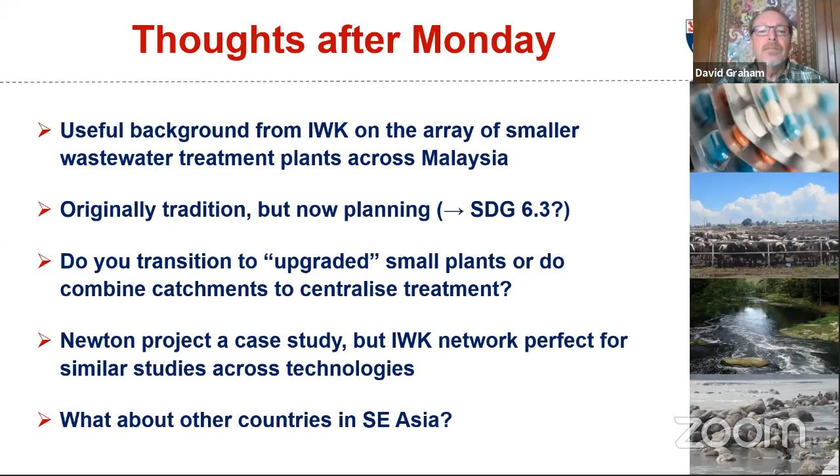The other question is more a question to other people in the group. We've now seen a nice picture of what's in Malaysia. I'd be curious about how this compares to what you find in other countries in Southeast Asia. We work in a number of other countries, but I was very impressed by the breadth of the treatment that existed in the country.

The question is whether you decentralize and improve, or you decentralize with new technologies. But the bottom line is that we still have the problem where some of these small technologies don't work very well. Sometimes they don't work very well because they're not managed extensively, but also because they're small. And small actually matters when it comes to biological treatment if secondary treatment is what you're really aspiring for.

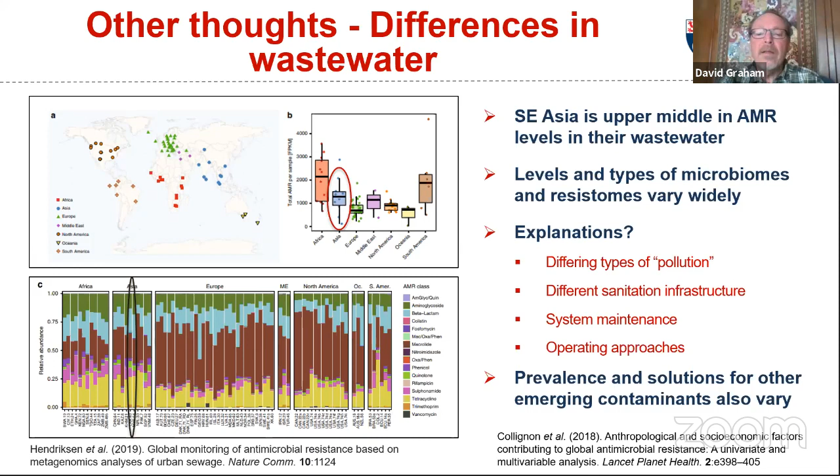So also when we're thinking about these decisions, this is another argument in favor of regionalization relative to decision making. Malaysia will be the best place to make these decisions, but in Malaysia, people have to consider some of the things they don't expect. And that's among the things we have to think about relative to health.

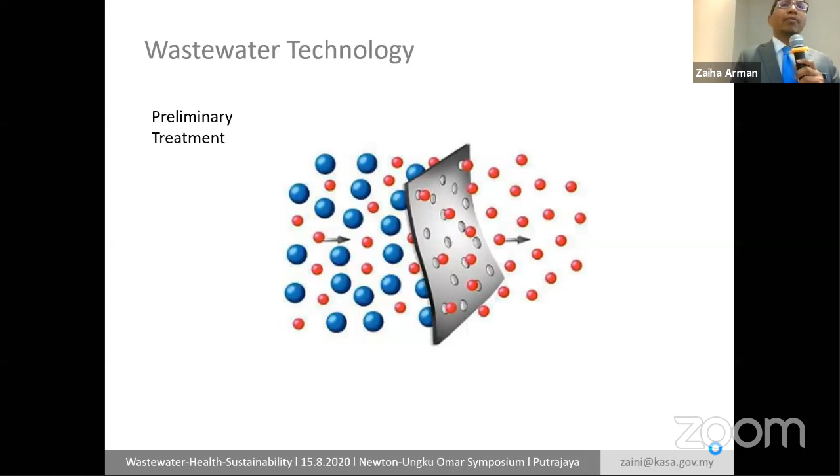But in short, for the past many years, the purpose of wastewater engineering, if you learned from the very basic, it started, according to the books, with preliminary treatment, primary, secondary, nutrient removal, disinfection, and we have all this. But I think it's very important for us. If I were to write a book on wastewater in the future, I would go by objectives.

It's by set of systems, units, and bioprocesses that we have. So, for example, number one is waste collection. We have to remove waste. Otherwise, you will be in danger of solid waste management, where you don't know the most efficient way to collect. And the second is public health.

The third one is resource enrichment, means that you have additional water. In the Malaysian plan that we are drafting at the moment, by 2030, we are aiming to have 1,500 MLD of reclaimed water. We will make it known in the next few days. Make sure that whatever resources we have, you don't want to let it go. It can be used for many purposes, especially industrial.

Then nutrient recovery and water recycling. So these are the outcomes. I think it is more appropriate now to talk about the outcomes rather than what is the size of the wastewater treatment plant we are talking about. What are the most efficient technology? If it is cheap and it can meet all the requirements, we go for it.

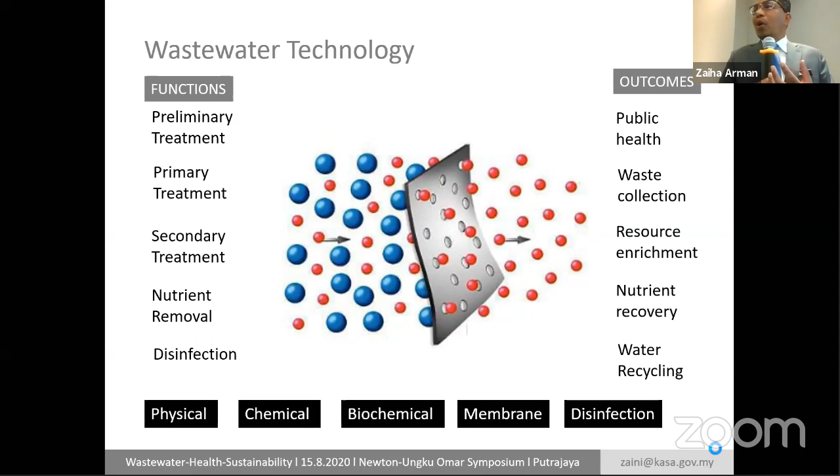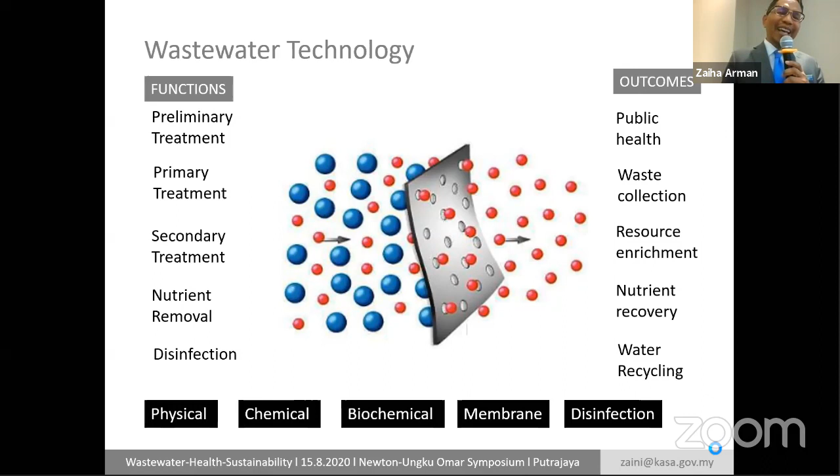Instead of obliging, because my PhD is on activated carbon, I want to use activated carbon everywhere. So this is the perception of many of us now, being in academics for so long. I found that is the sickness within the academic community. They want to sell whatever they know without being able to learn something new. I'm so sorry, David, for saying that. You can disagree with me, but I think this is important.

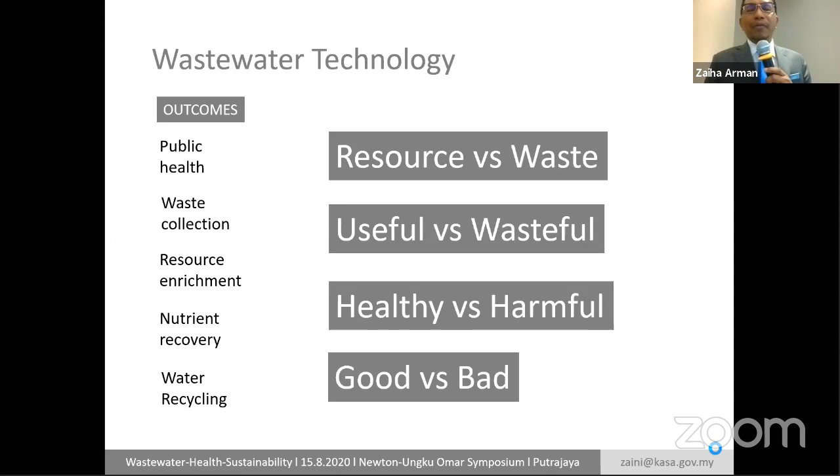Resource versus waste is something that we have to identify. What is useful, what is wasteful, what is healthy and what is harmful, and also important, what is good, what is bad. By having that, we will be able to use various kinds of technology, and by matching them with the outcomes, we'll get what I call matching CBA, cost-benefit analysis. I'll give you an example.

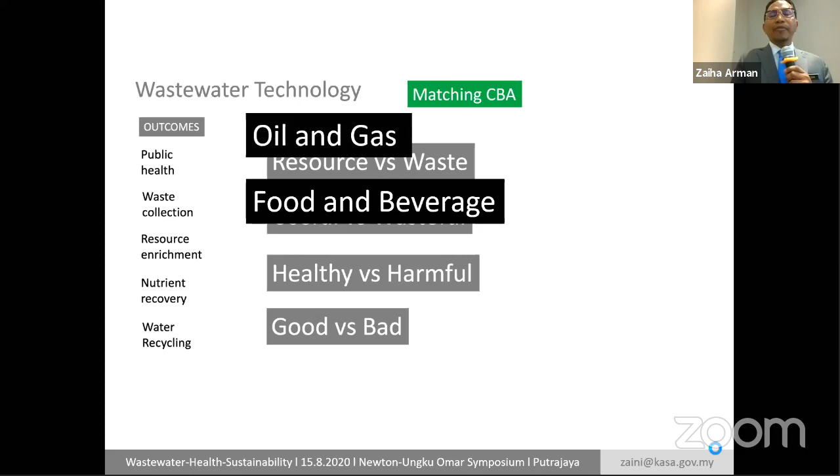For the past many years, advanced wastewater treatment plants are being funded by oil and gas companies, especially if you're thinking of advanced solid liquid separation, advanced liquid separation, membrane treatment. It's all funded in the first place, in the earlier stage, by military and oil and gas. Then food and beverage, manufacturing, agriculture, and environment. And this is the opportunity for us to look back into this.

I think now we are moving from linear economy into circular economy. In the past, we extract as much water as possible, we supply, we use it, and then we treat it and we dispose it. That's the linear economy. But in the future, we are not going to do that. We think that whatever we extracted from the natural environment can be used up to a certain level.

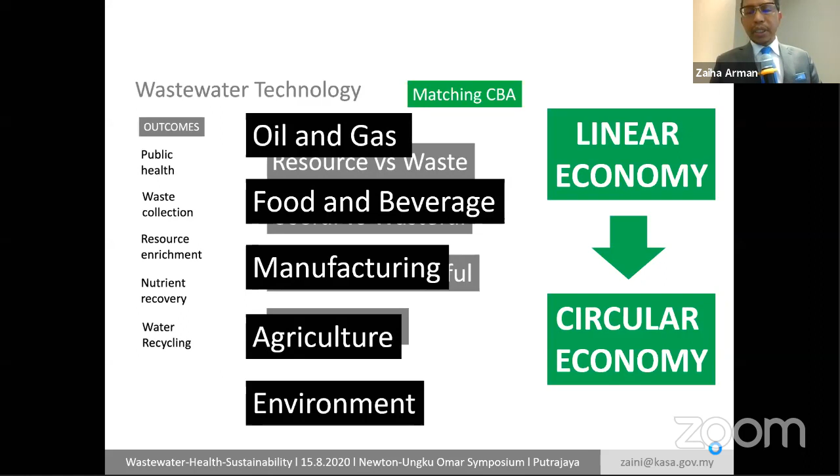I think today we are here to discuss clean water and sanitation from the perspective of SDG. So this is what we discuss in the World Health Organization. For example, we have been discussing this for many years, and then recently we came back with a nice sanitation safety planning. Started with safe use and disposal of wastewater, grey water, and excreta in particular. So we have to prepare the SSP,

So identify hazardous events, assess existing control measures and exposure risk, and then develop and implement an incremental improvement plan. This is very important, and it's very expensive. In Malaysia, we have 3 ways to fund our sewerage programs. First, by housing developers. So if you are staying in Johor, for example, almost all residentials in Johor Bahru at the moment are, I think, funded through the mechanism initiated by project proponents, the developers.

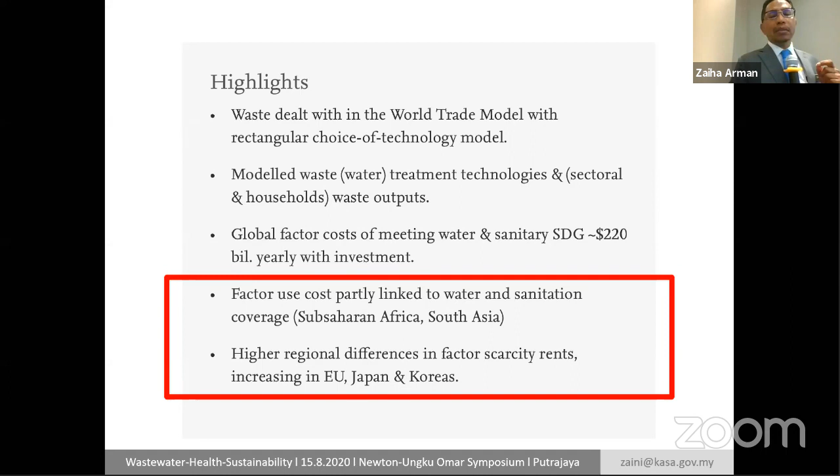When we talk about the whole water ecosystem, factor use cost is very prominent in Africa and South Asia. But in other regions, factor scarcity rents means that because of the scarcity of water, they are willing to pay more, willing to invest more in better technology, better facilities, to make sure that they get better water supply in particular.

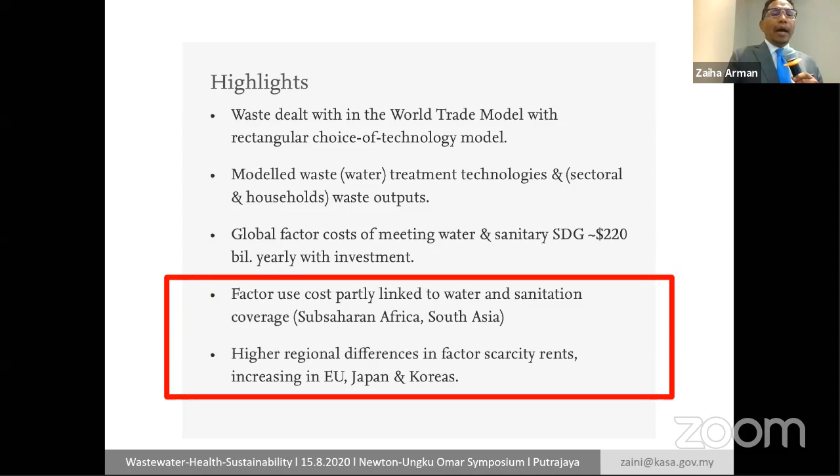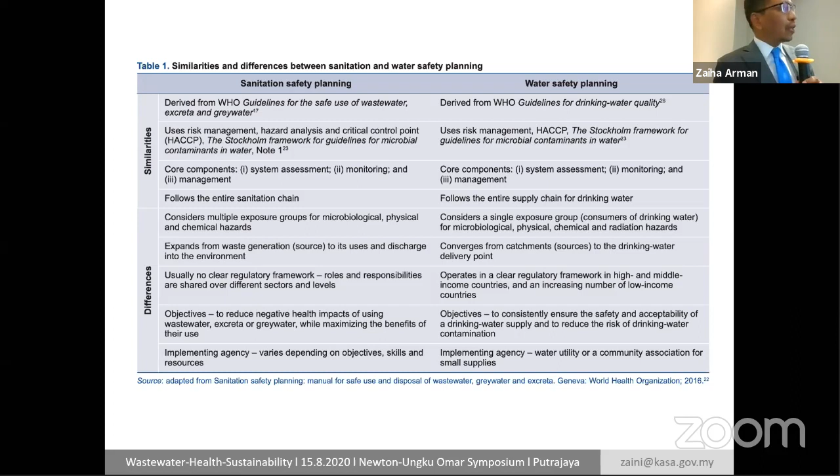You can see other studies done, and this is very important: sanitation safety planning and water safety planning. I was involved in water safety planning 15 or 20 years ago, and I see a lot of similarity. One obvious difference is the regulatory framework. In sanitation safety planning, the regulatory framework is not that prominent, especially for individual septic tanks and small-scale offsite sewage treatment plants. It's difficult to monitor as a government, as a regulator.

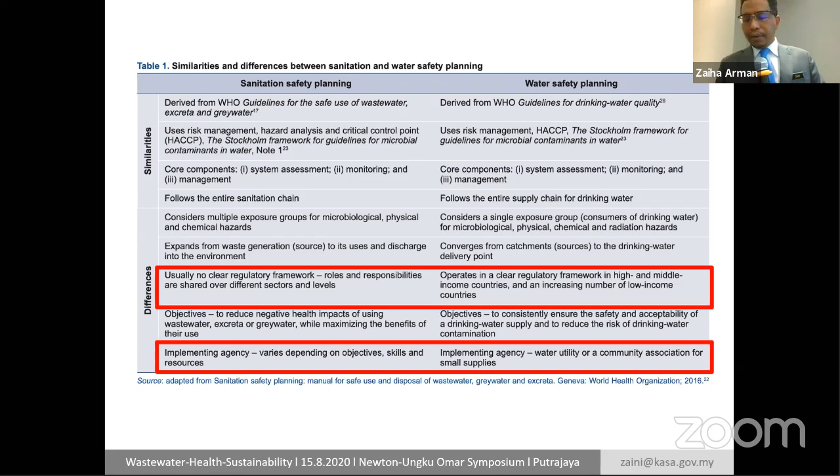Unlike water safety planning, where you can easily have that in place, because people are afraid that if they are not drinking good quality water, they might get various kinds of diseases. So, okay, I want to end my presentation by putting this in place. I'm talking to scientists largely.

This is the first thing you do. If you have something interesting to research on, you do scientific research. And after that, you have to prove some concepts. And then you start to think how to commercialize that. And the best thing that I think we can embark on is to go on open market. If you rely so much on subsidy, you will not survive. You must be able to survive in open market and link that with government policy, SDG targets and whatnot.

And finally, by cultural adaptation. I give you an example. This is a classical example. Many of my books recently are using this example. It's sewerage objectives and approaches. And the objective is to have high quality receiving waters. And this is linear framework where you extract water and then you use it, you collect them, and then you treat, and then you dispose.

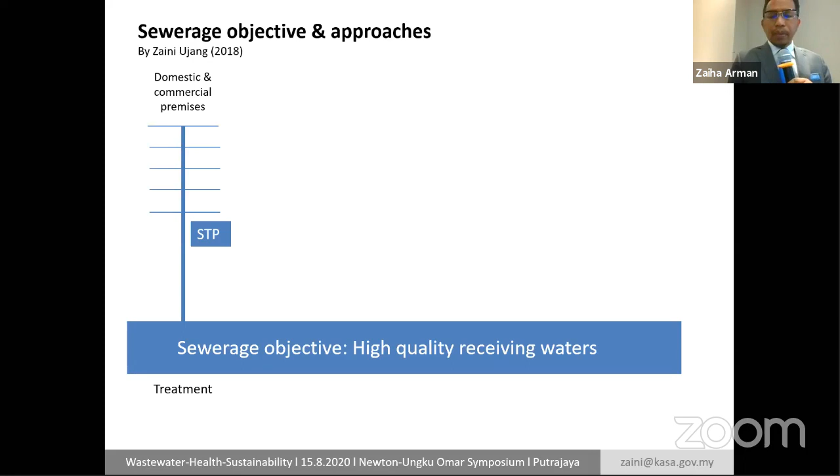This is what IWK and many companies similar to IWK are doing. They collect wastewater from domestic and commercial premises, and then they connect. The question is, some of them are not connected. So, for example, if you are thinking of Kuala Lumpur at large, at the moment we have more than 6,000 population equivalent facilities for sewage collection and treatment. But not all are connected. Old houses are still not connected. Only new houses, new buildings, I think post 1980s, are connected. The rest are not connected.

Bungalows close to UTM-KL are not connected, and many buildings that I know very well. So probably about 20%, 30% not connected in Kuala Lumpur at the moment. In the biggest sewerage project that we have at the moment, the Langat sewerage facilities, the funding is about 1.6 billion. We are about to complete the project.

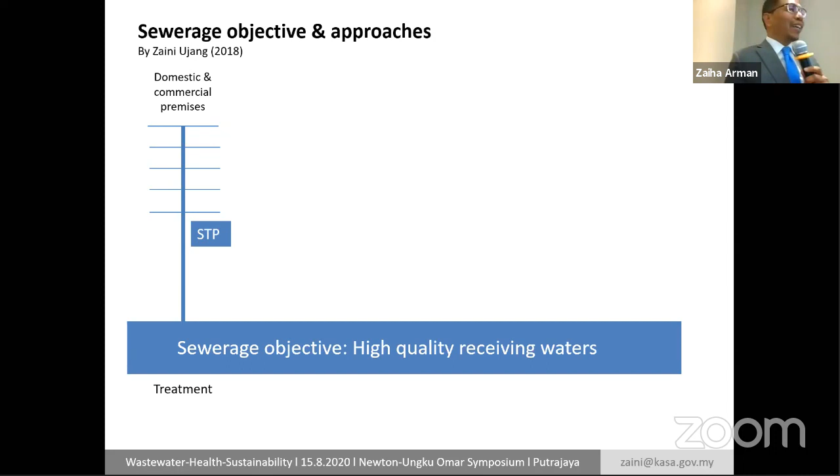So in order to sustain, because of low connectivity, we are now allowing industrial premises to be connected to sewer. This is a new thing in Malaysia. I think we started this year. The year before we tried to start, but we were not able to do it. So we are trying to do it now by having industrial premises. And instead of having an STP at the end, now we are trying to use a water reclamation plant in between.

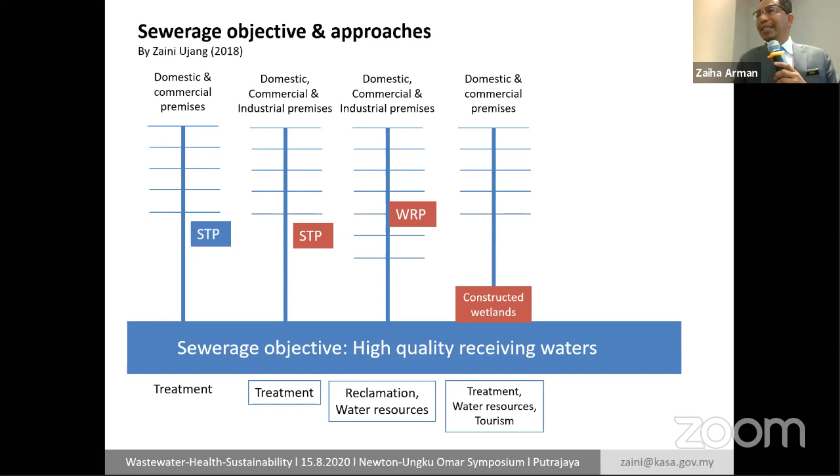Because industrial premises are already in the loop, we treat, and about 70% of the water is to be recycled. And if you are not able to be connected, we can have constructed wetlands at the end. This is easier, no complaint from people because they don't have money to pay for the connectivity and whatnot. And this is what we hope in the future that we can do. So I just give you an example. We migrate from the first one, and then we have 4 more options in the future. And this is largely because of health, sanitation, and financial consideration. Thank you for that. Assalamualaikum.

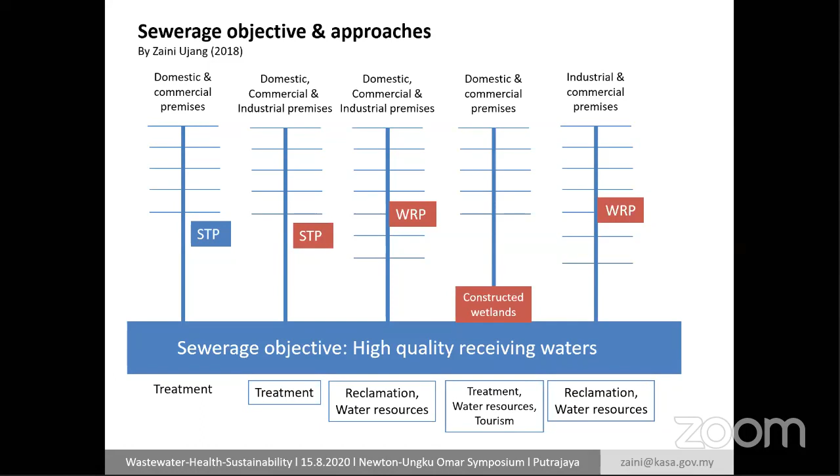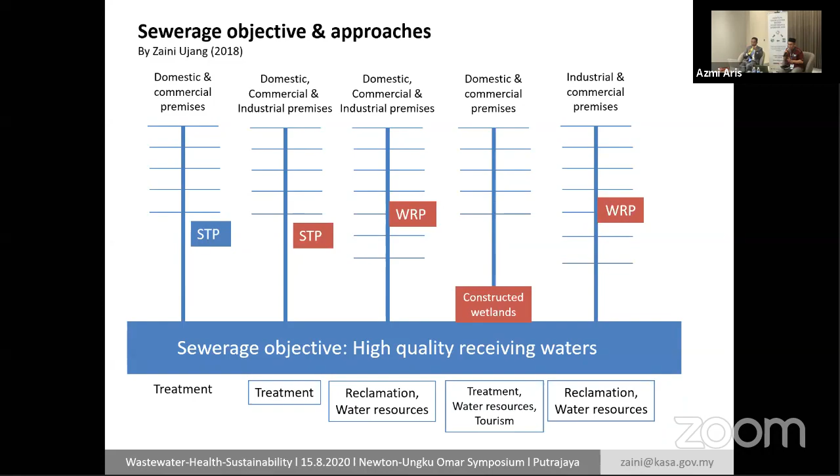Okay, thank you, Dato', for your presentation, and also Professor Graham's presentation just now. I think it covers quite broad topics. Professor Graham basically covers more on decentralized wastewater treatment, comparing Malaysia and other countries, especially in Southeast Asia. And Dato' Sri was covering many treatment processes, what we have in Malaysia in terms of centralization, and the future for the Malaysian sewage industry.

So I think it's time for us to open the forum to questions, either from the floor now, or from our audience connected online. Anybody? Yes.

Thank you, and congratulations, Dato' Sri, for a very interesting presentation. You highlight very important issues relating to the sewage water pipeline. There are at least 200 small STPs in the upstream. And this is actually common in other parts of the world as well. We are actually drinking water that has been flushed many times.

Then the issue is whether the treatment system is efficient or not. If the treatment system is efficient, then I think we have safe water to drink. At the same time, when we talk about treating reclaimed water connected to the water supply system and then used for domestic purposes, it seems that it is too. Oh, no, that is industrial. No. Normally we connect it to industry.